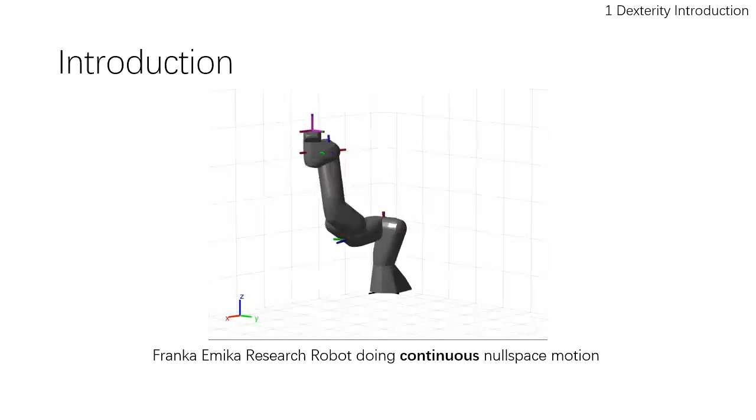It is a common misconception that all joint configurations for the same pose can be achieved through only continuous nullspace motion. Take a 3-link robot as example. Indeed, you can continuously move in this nullspace, but reaching this configuration must have a reconfiguration of the end-effector pose.

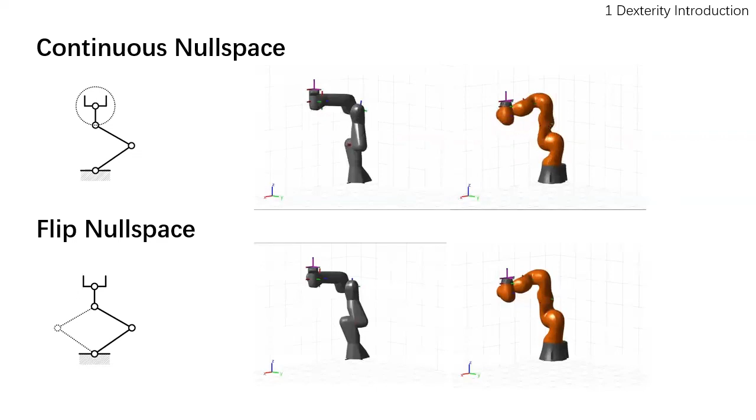Hence, for a nullspace of the robot to achieve a certain pose, we can divide between continuous nullspace and flipped nullspace. We introduce an additional description of nullspace, swivel angle. Observing the configuration, the robot can have a vertical reference plane and a shoulder, elbow, wrist moving plane. The swivel angle is the angular difference between these two planes.

To adequately express both nullspaces, we design an enhanced dexterity map data structure. The map stores the solution status S and the corresponding joint configuration Q. 3 indexes control the end-effector frame by position, direction, and rotation. 2 indexes control the nullspace in sense of the nullspace swivel angle and the flip nullspace.

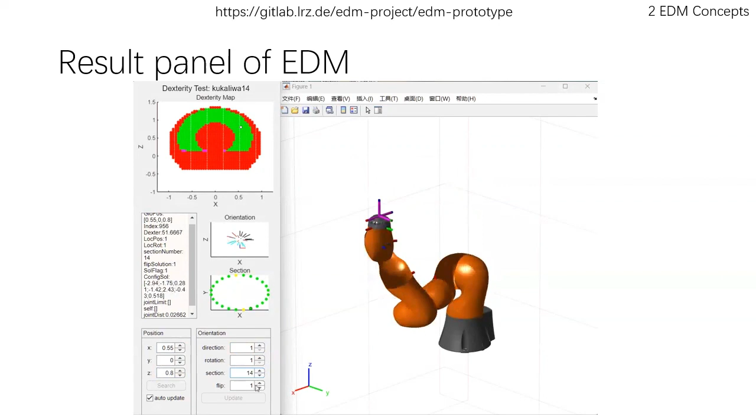We could see a panel for the prototype toolbox for EDM generation. Different indexes could control the robot in different ways, like position, direction, and rotation. Changing the index on the left will deliver a different configuration on the right. The most important contribution here is that the nullspace configuration could be independently controlled with 2 indexes in a clear way. The panel itself is quite informative. For more information, the toolbox and the dataset are open source for your exploration.

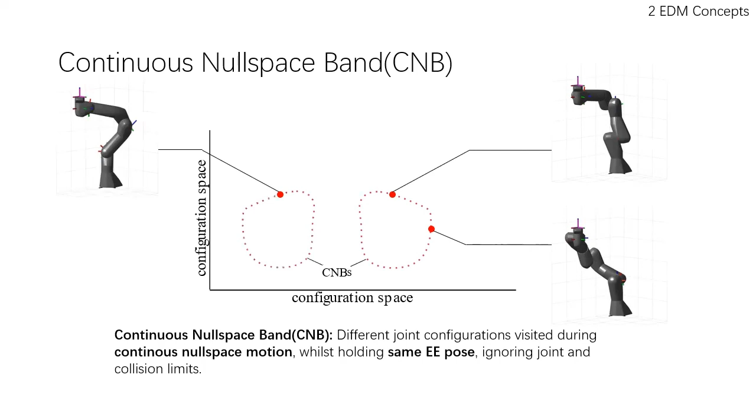Furthermore, we conclude a helpful concept, continuous nullspace band, in short CNB. In configuration space, from one configuration, we do the continuous nullspace motion to get one CNB. Different points on the CNB suggest different swivel angles, but the flip solution is at a totally different point in the configuration space, and therefore they can get an independent CNB. We could see an example of KUKA and CNBs in configuration space. We can observe how 2 kinds of nullspaces influence the robot configuration.

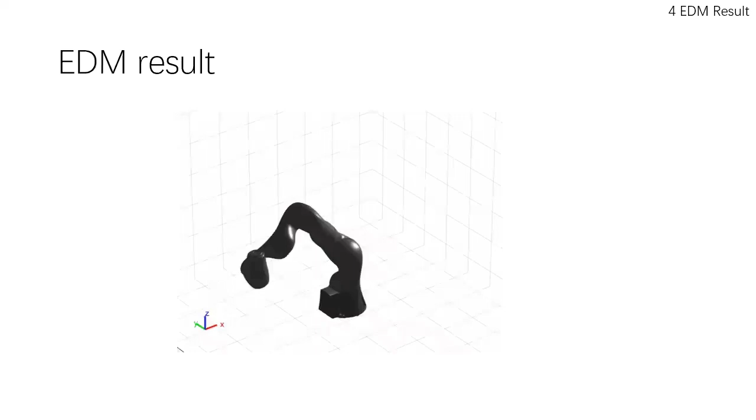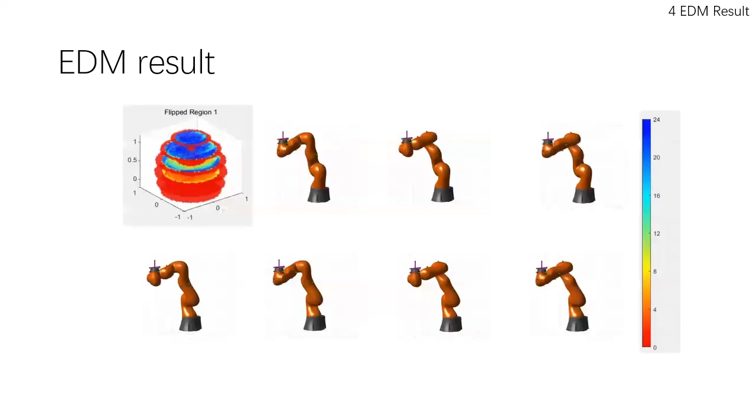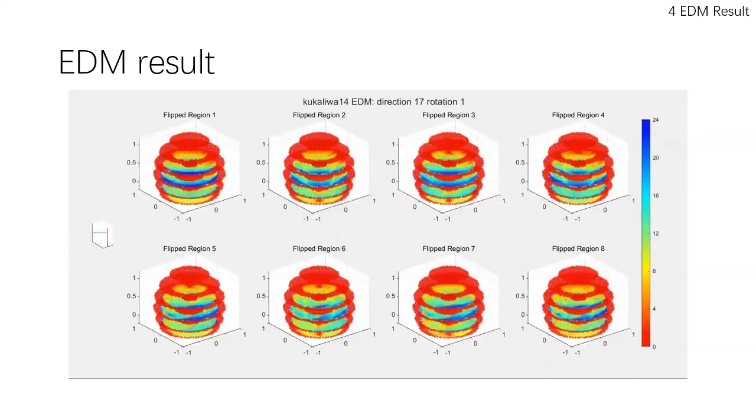We could observe many interesting things of EDM. For instance, for specific direction and rotation and flip, we use the number of valid continuous nullspace configurations as a score in each position. We can therefore get a map. Repeat this process for each flip region, and we could get the full information of EDM. It could be observed that in different flip regions, continuous nullspace performances are basically the same, but there are from time to time low performance areas in specific flip regions due to the joint limit.

Many existing maps could be deduced from EDM by doing simple mathematical operations on solution status, configuration, or Jacobian. We can even combine them together to get a comprehensive consideration of the performance.

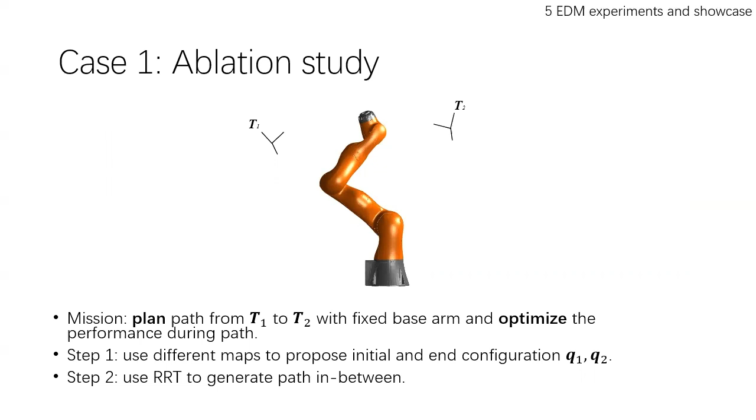Consider a case of path planning for the fixed-base manipulator from frame T1 to T2. Different maps suggest different start and end configurations Q1 and Q2. 20 different start and end configurations are suggested from different maps. The path in between, generated by the RRT, is then evaluated by path length, distance to joint limit, and manipulability. The path is also displayed in real time on the bottom left corner. Nullspace information used for planning is also visualized on the bottom right.

For most existing maps, the evaluation metric is assigned for each position or each pose in the workspace. This planning scenario fixes the base and target. Therefore, the planner has only one single value for the nullspace information for both start and end. This is also the reason why it has an awkward path during long-distance reconfigurations.

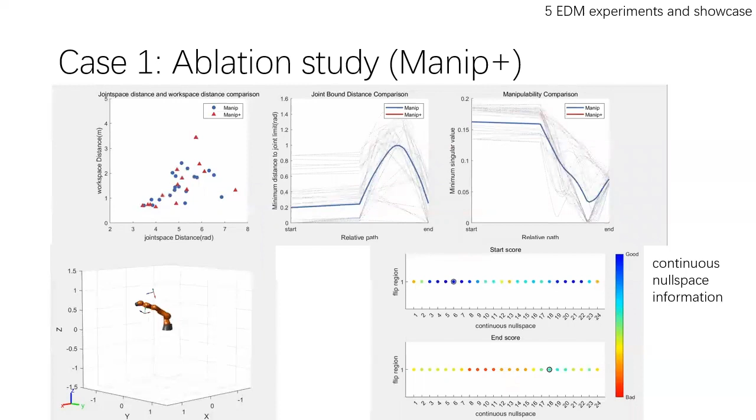We also test a map that considers the continuous nullspace information. We could see planners are trying to use the nullspace information by choosing a better start and end swivel angle. The performances are on average better, but still, the flip region information is missing. The full information of EDM contains information of continuous nullspace and flip nullspace. The information from EDM allows us to strategically select configurations with better performance in the same flip region.

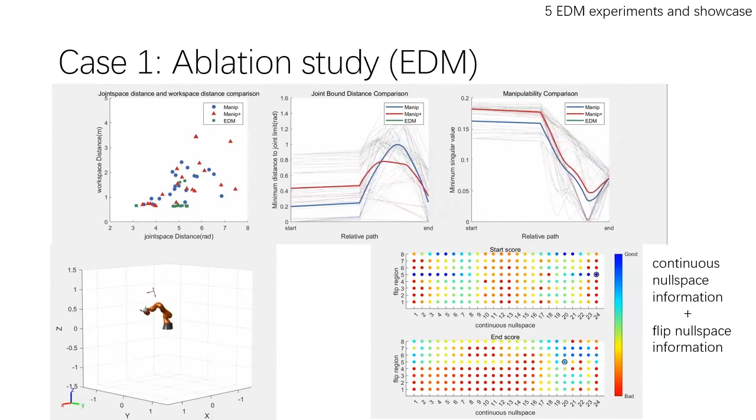In conclusion, this thesis contributes EDM, which is capable of considering both continuous nullspace and flip nullspace. We can integrate many current evaluation frameworks into our work to make a comprehensive consideration of performances in different flip regions.